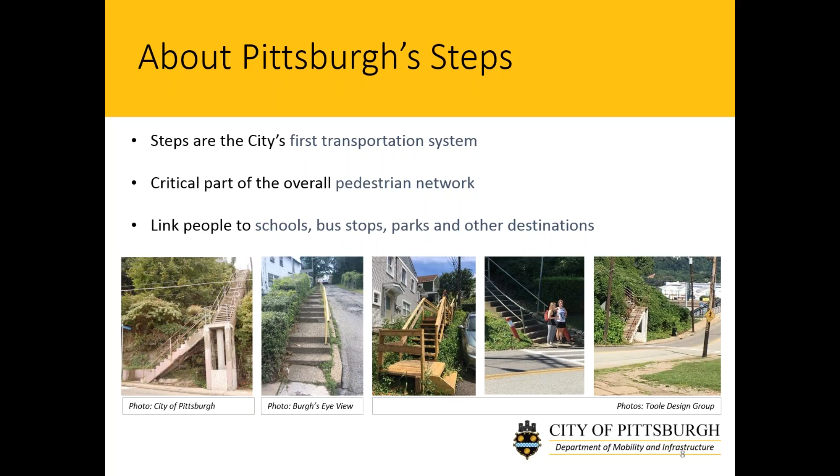That's relevant because the on-structure steps are really like building and staging the rebuild of a mini bridge. The only steps project we've rebuilt in recent years is a set called Joncaire, which I have photos of later. That project was originally budgeted at about $400,000, and it ended up being about twice that when all was said and done, really because of the staging process and the complexity of building on a steep slope and building a structure that really is like a mini bridge.

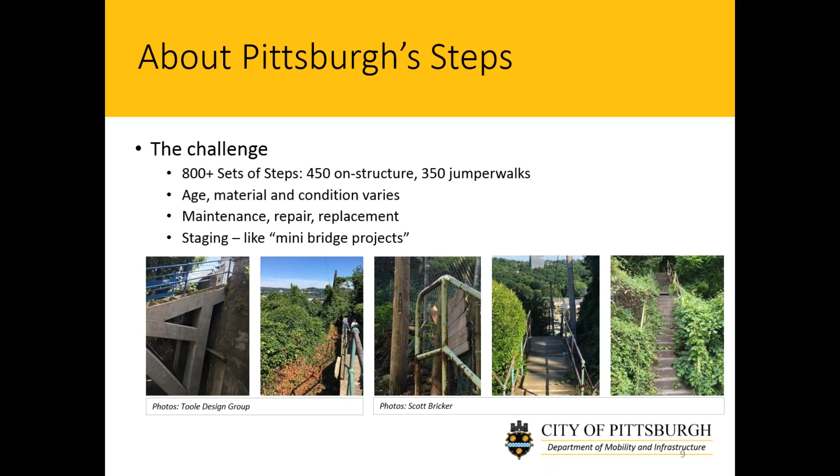Most of our steps were built in the 50s and 60s. They are deteriorating, they have not seen significant maintenance, and we want to figure out what to do with them. Since I've started, I've always said that if someone gave me $700,000 today to rebuild a set of city steps, I wouldn't really know where to start, because we've never gone through the sort of prioritization process that I'm going to talk about today.

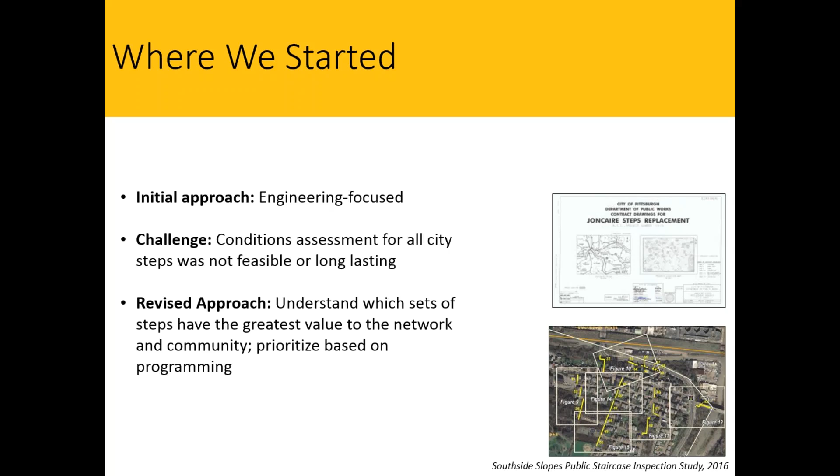Our initial approach to the Living Cities application was more of an engineering focus, actually going out and getting an engineer's assessment of the condition of all of our steps. It's always important to talk about things that you changed in a project, and we really changed the focus to be more of a planning project. We found that the engineer's assessment wouldn't last quite as long as the prioritization process or some of the planning work, and it would be way more expensive—the half-life for an engineer's estimate is just a lot shorter.

So our goal for this new planning project is to actually prioritize staircases based on geographic analysis, but also reaching out to the community and talking to them about which sets of steps really were critical links in their transportation network. We also wanted to decide how we were going to rebuild steps in the future—looking at best practices from other cities, understanding if there are better, cheaper, or more long-lasting ways to build steps than in the past, and then looking at investment strategies for some of those top steps.

A big component of this project was going out to talk to stakeholders. One of the other challenges of talking about steps is that they're so well dispersed throughout the city, so you can't talk about steps as one entire group—they really have to be discussed on a neighborhood level. So we tried to approach the public outreach from many avenues.

We had a citywide kickoff meeting where we talked about the prioritization methods. I feel like the people who show up for all the transportation meetings showed up to this one, and they love talking about transportation. We also had an online wiki map where people could log in and give us comments on one particular set of steps and tell us how they use it. Then the planning office—myself and colleagues—went out to many neighborhood meetings to introduce the project, help people get on the wiki map, and gather feedback.

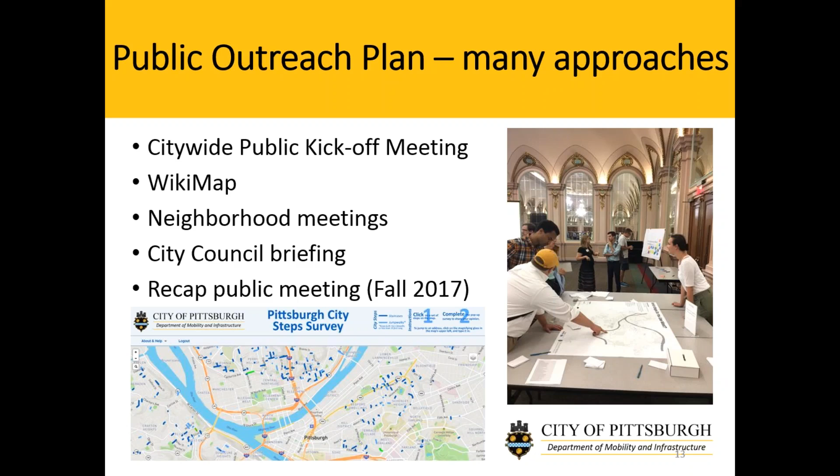In the kickoff meeting, we wanted to use that as a way to check what we thought our priorities should be when going through this step analysis. So we asked people what makes a staircase important. We assumed that access to destination and its actual function as a transportation link is what made a staircase important.

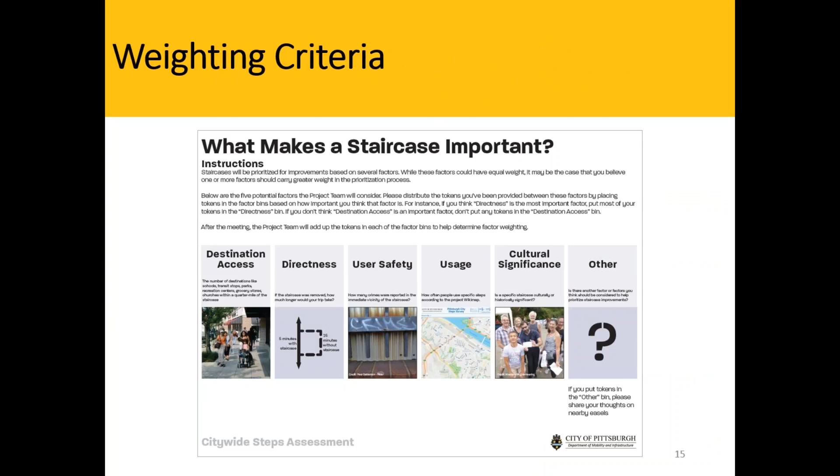We found from talking to people that they also feel like this. One surprise from the public outreach and from talking to the community is just that we knew our steps were popular. Kind of a side note, when I was doing volunteer work on the steps, I sent out a request for volunteers, and we had 300 people sign up within a day to go outside and actually count our steps. So people here love the steps, and that message came through in our public outreach.

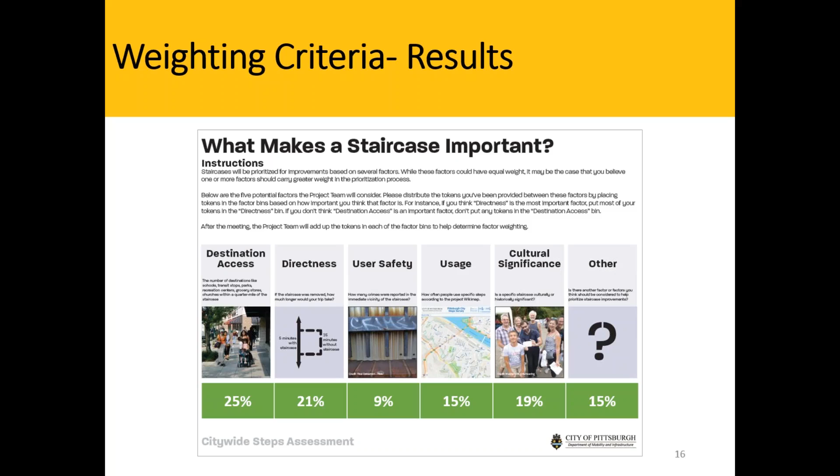As you can see, cultural significance is ranked pretty high compared to the others when asked what makes a staircase important. When we asked people how we should improve our steps, we also got something we kind of expected: structural condition. Some of our steps, it's hard to convey through photos, but they really are hanging off the edge of a steep slope, and they don't look like they're in great shape. So we know that's an issue.

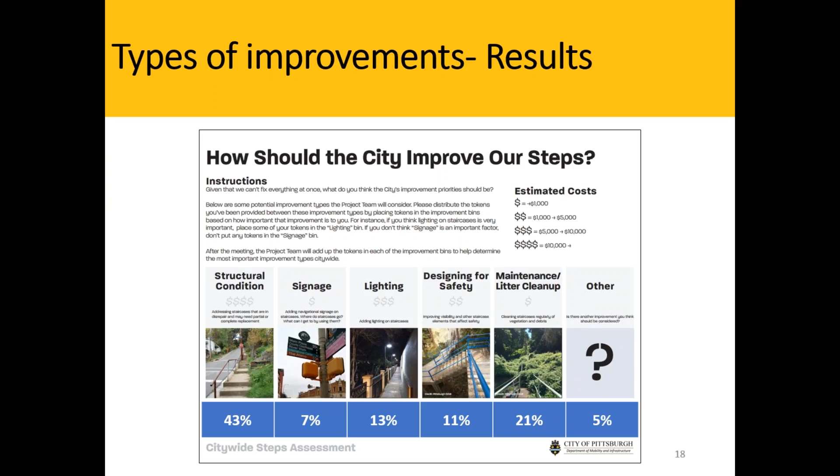But something else that was surprising from this, as well as neighborhood meetings and the wiki map responses, is that we think small projects would really go a long way. Things like maintenance and litter cleanup, painting the railings, patching small pieces of concrete. These locations are also usually situated in places where there's a lot of invasive species, so really addressing that.

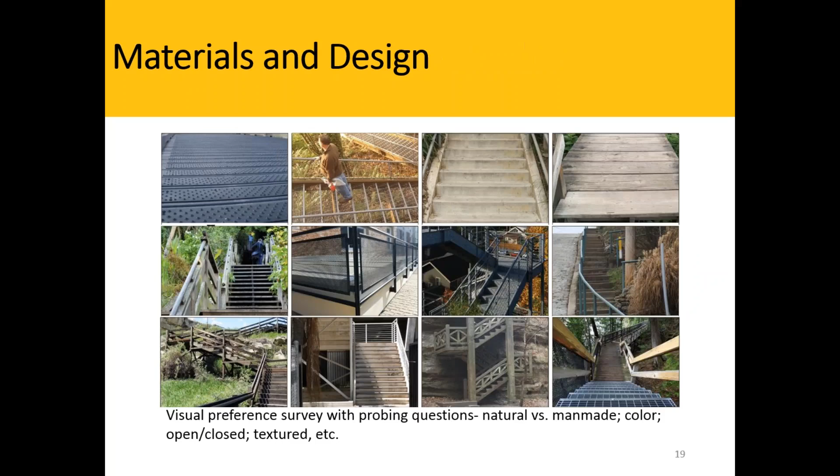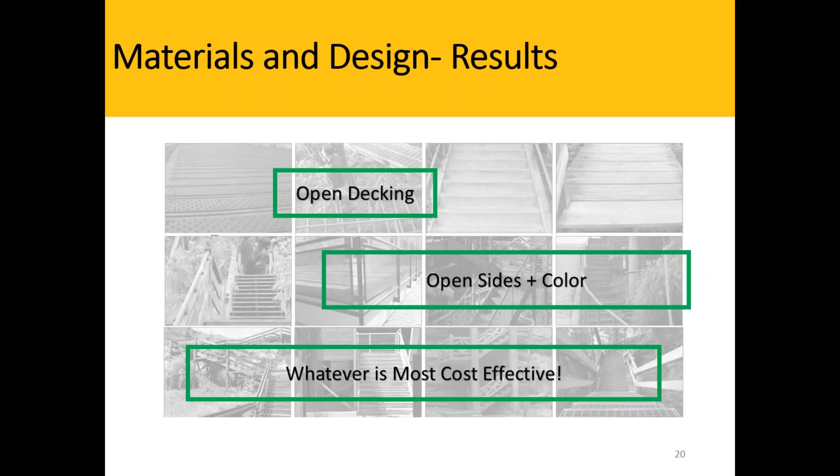We also asked people about their materials preference. This had some surprises for us as well. People actually valued open decking, the idea of something that wouldn't hold snow or ice. So we'll definitely look into that more. And something that I think a city agency would always love to hear: when we asked people how we should rebuild the steps in general, they really just want whatever's most cost effective. So we'll take that and move forward.

But like I mentioned earlier, the most commonly mentioned obstacle to people actually using the steps on a daily basis is overgrown vegetation. And then second is structurally unsound. So we learned that the vegetation issue is a really big deterrent for people when they're thinking about using the steps versus another means to get to their destination.

We also asked people about the community's role, because we have this community that really cares about the steps. We wanted to know from neighborhood groups and people filling out the wiki map what sort of energy there is or what the community's role should be. We had a lot of really interesting answers, from wanting a more coordinated reporting system for issues on the steps, to wanting to build art projects and have a stewardship program, and things like that.

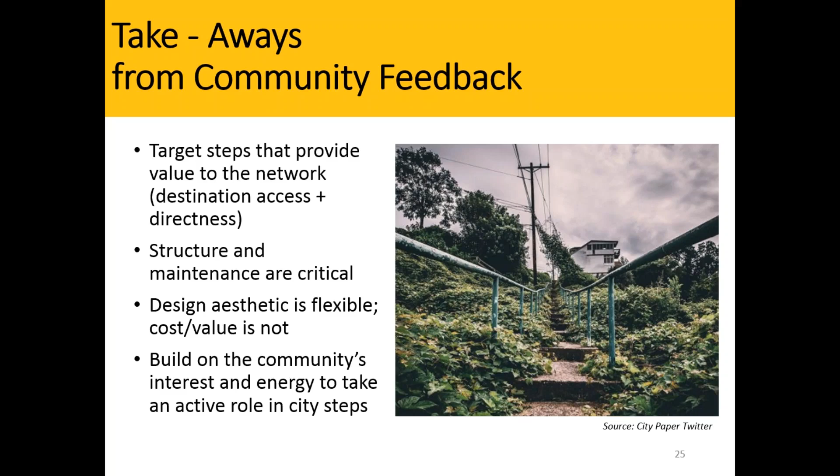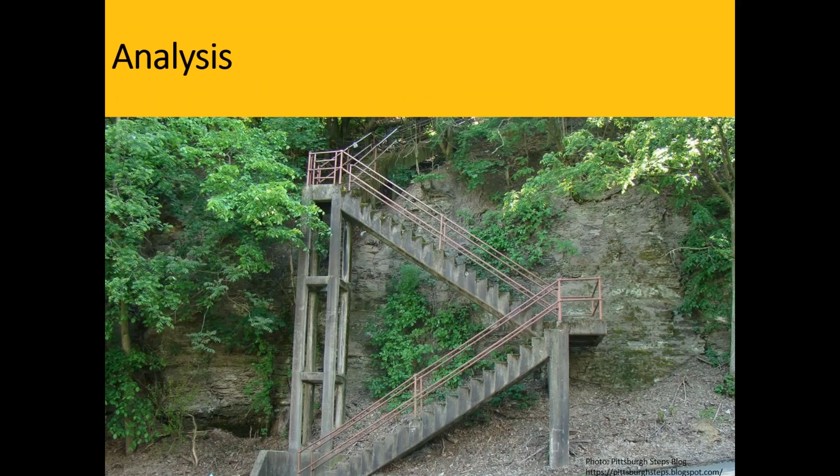So our takeaways, some of which I've mentioned: really look at the steps that provide access to destinations, find those, build on the community's interests, really build that stewardship program, and of course, fix the steps, fix the structure. Here's an image of one of our step structures, and you can imagine how that might feel if a railing was a little bit shaky, or if you could see rebar in the structure. They're really navigating a lot of terrain.

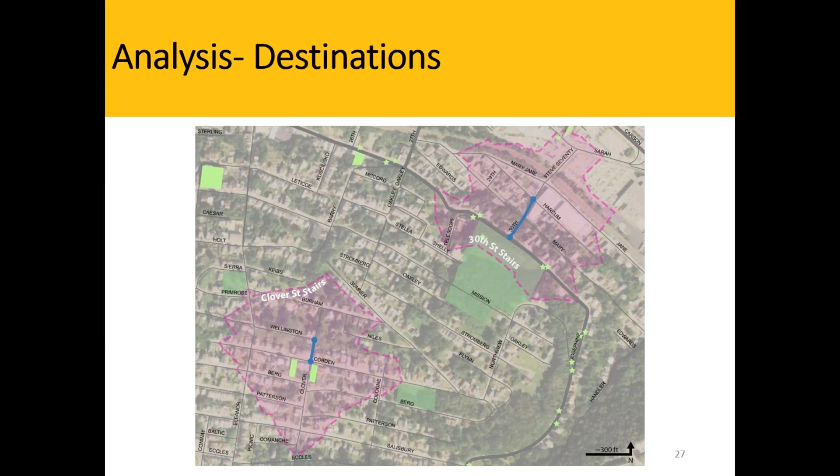So the way that we analyzed our steps, with Toole Design Group doing a lot of this great work, we really looked at the walk shed. One of our analysis points was access to destination, so we looked at the walk shed within the top and bottom of each staircase and gave it a point system based on the type of destination there.

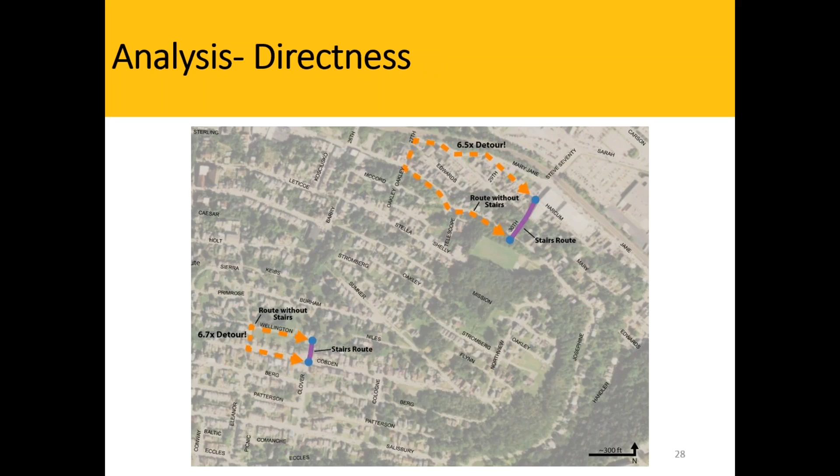Another factor was: if we take this staircase out of the network, how much longer would someone have to walk to get to the same destination? That's the detour ranking. We also looked at the transit ridership within the set of steps, and the population density within that same walk shed. We did give steps in areas with a lot of low-income households a higher ranking, knowing that walking and access to transportation are more critical to those areas.

We also had to look at step density. We had an issue with our analysis where a lot of areas with lots of steps were given a low ranking because the steps were taken into consideration when looking at the detour analysis. So we had to give them a point just for having a lot of steps in the neighborhood.

We also wanted to catch steps that were special for other reasons that didn't make that overall list. We looked at which steps are really important specifically to transit riders, so ridership within the walkshed and population density within the walkshed. We also looked at steps that were important for access to school, again using population density, detour, and whether there's a school within the walkshed.

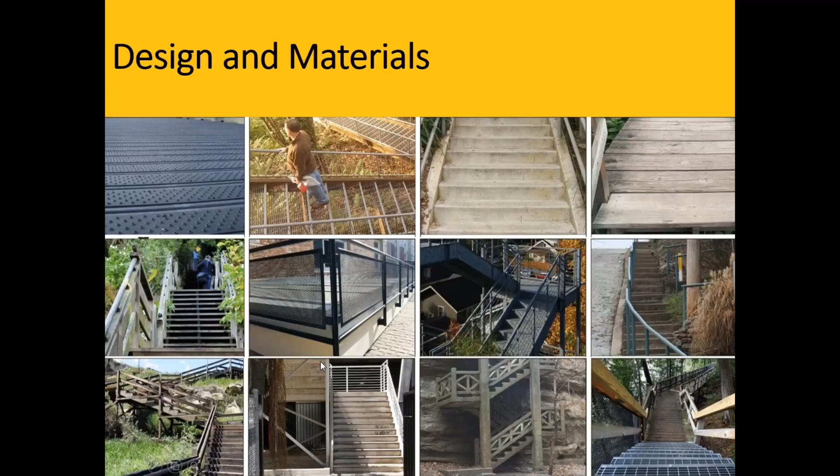First question, just a clarifying question for me: I assume it was the knotweed that was the invasive species and not the goats. Is that correct? Yes, I think that was actually morning glory — I'm not a plant expert, but probably a little bit of both. I think we have some knotweed right in the front there, and we also have a lot of morning glory in the area. Yeah, anyone who's dealt with steep slopes and invasive species knows there's no quick and easy answer to that.

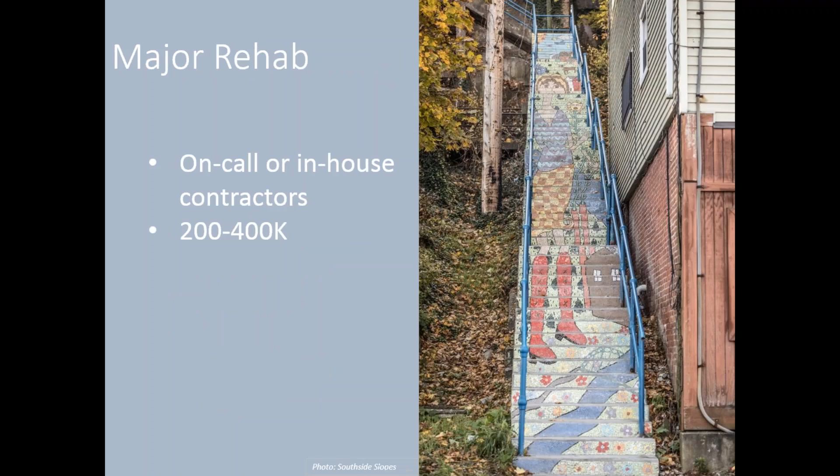First question is, we're talking about priorities, and you've done a great job outlining where the city has prioritized some stairs. But how have you balanced community priorities with the budget realities? How do you explain decommissioning a set of steps that may be useful to some, but a lower priority for the citywide effort? We have not tackled a decommissioning policy right now. Currently, our decommissioning policy is that if there's a life safety issue, our DPW crews go out and put a bar over the steps with a sign that says steps closed.

There's no process behind it, no funding to fix those big life safety issues. So with this program, I'm assuming we're pursuing a policy that would look at each of these categories. This is only talking about the top 148 steps, but it would be a policy that would say we are going to maintain these 148 steps, reassess them, and do this analysis again every 5 to 10 years. We are going to maintain our top steps, but it might also say that bottom 25%, we won't spend more than X amount of dollars maintaining them.

And that is going to be a tough conversation to have with the community. However, having had some discussions with the community, they kind of go, well, if we take this bottom set of 25% of the steps that we aren't going to spend a lot of money rehabbing, that will allow us to fix 56th Street, which you've all asked us to rebuild. I think the community does understand those kind of trade-offs.

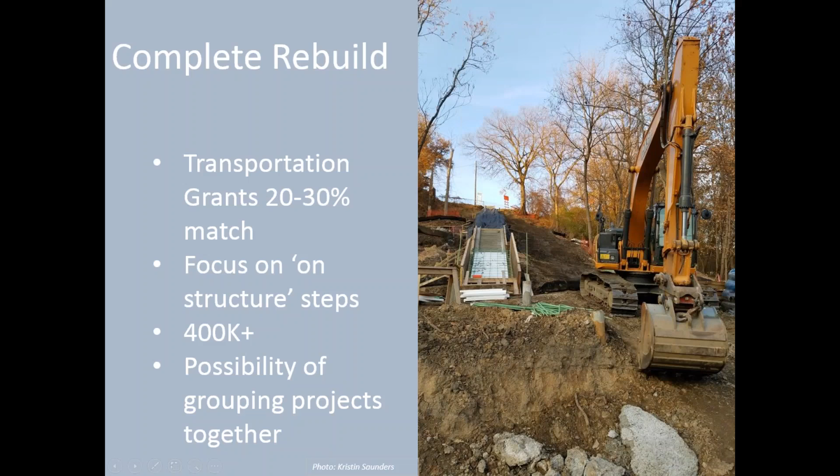Got another question from Elizabeth, who asked about other cities you looked at. Which cities, and what did you learn? Are there any financing strategies they're pursuing that you can't?

We looked at Cincinnati, Seattle, and Portland, but there weren't any really creative financing strategies that we aren't already pursuing. We also have the most steps—Cincinnati has about 300 sets—so I think it's our problem alone to deal with the massive amount of steps in Pittsburgh. But we're doing mostly similar things, looking at federal grants and small projects we can do in-house.

They did have a lot of advice on how people are rebuilding steps. Something we've really taken to heart is that concrete is really the only way people are getting a 75-year life cycle, and Seattle is looking with every set of steps at ways to build them on grade, where the fail point is less critical and they're easier to maintain.

The other advice we got is to never give up the right of way—plan for the future. Even if you can't rebuild a set of steps now, you never know what's going to happen with development in that area, so keep the right of way secure. That's something I forgot to mention—I think our staircases are actually city right of way. They're city streets.